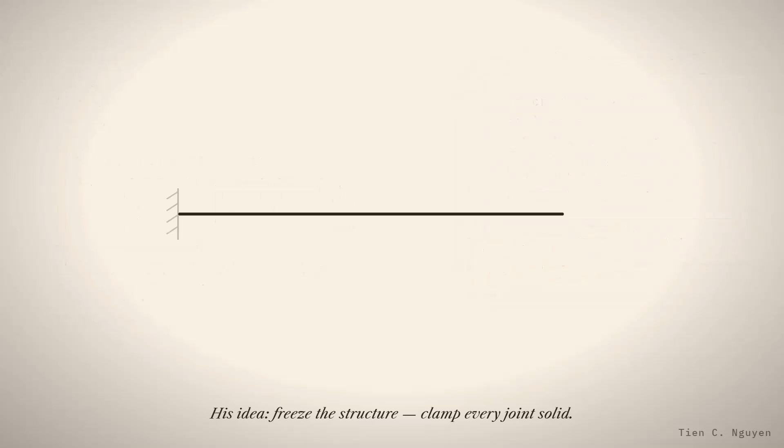Hardy Cross was a quiet professor from Illinois who turned structural analysis upside down. In 1930, he published a paper just 10 pages long, 10 pages that would dictate structural design for the next 40 years. His concept was brilliantly simple: freeze the structure, clamp every joint completely rigid.

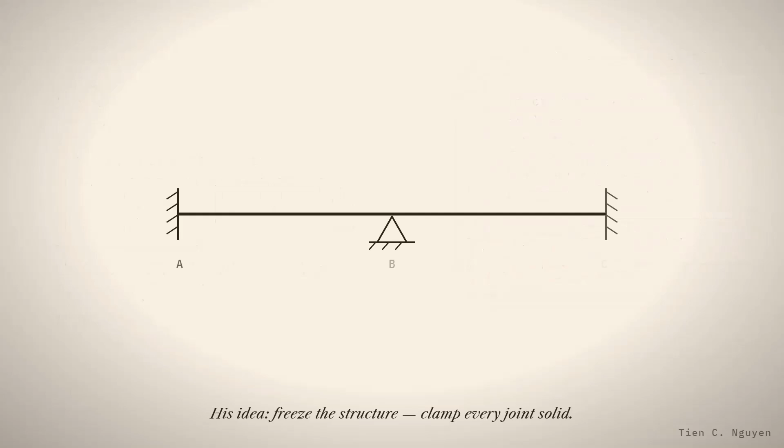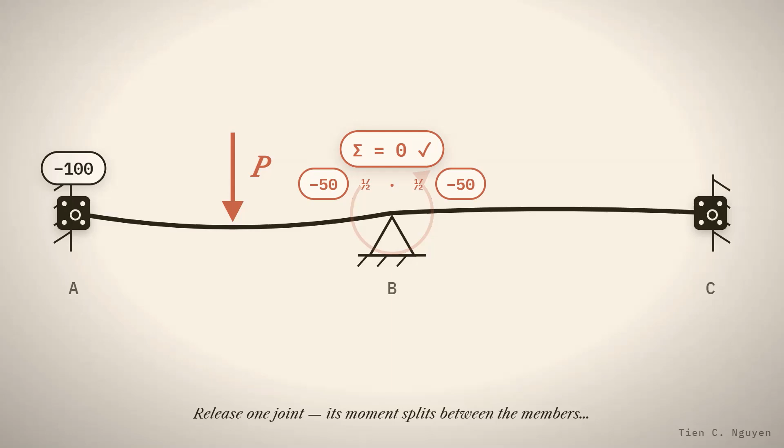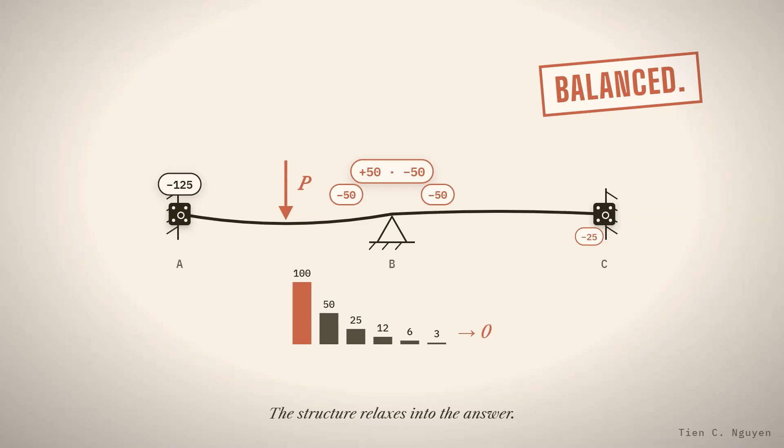Load it up, each clamp locks in an unbalanced moment. Now, release just one joint. Its moment splits between connected members, and half of each share travels next door. Clamp, release, distribute, repeat. With every cycle, the unbalanced moments vanish. The frame quietly relaxes into total equilibrium. No computers required. Just simple, elegant iteration. And that was how the world built its buildings for the next 40 years.

Today, finite element solvers handle the linear algebra in milliseconds. But Hardy Cross gave engineers intuition. He taught us to visualize how moments actually flow. This is the moment distribution method.

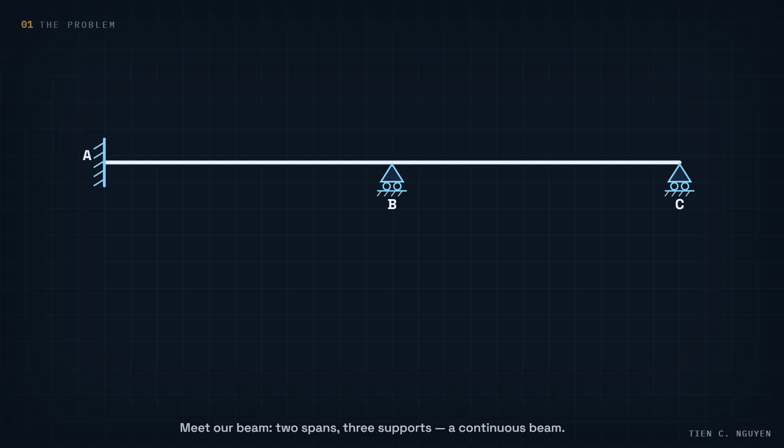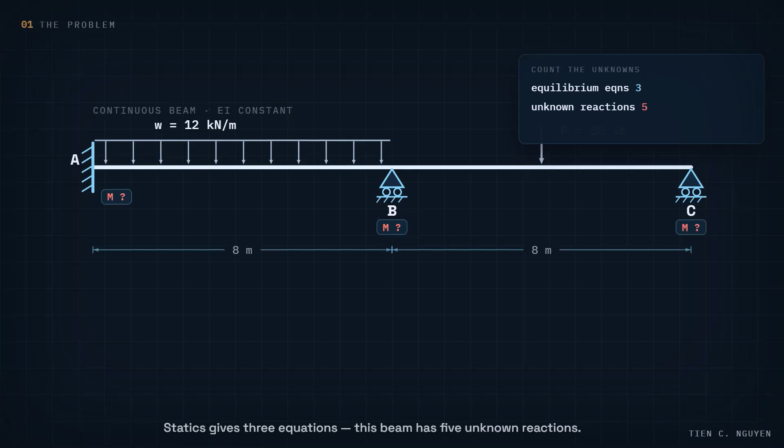Suppose we have a beam with the load configuration shown on the screen. Statics gives us 3 equations. This beam has 5 unknown reactions. It's statically indeterminate. Equilibrium alone cannot crack it. We need a routine.

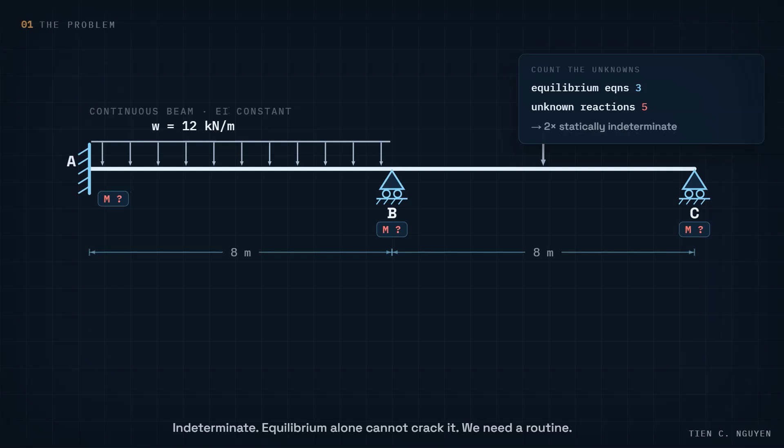Here's the trick. Clamp every joint so that nothing is allowed to rotate. Now release just one joint. It spins until the moments on either side of it balance, and then we clamp it again. Every release leaves a smaller error behind than the one before it, so we repeat until the corrections become too small to matter. That is the entire method.

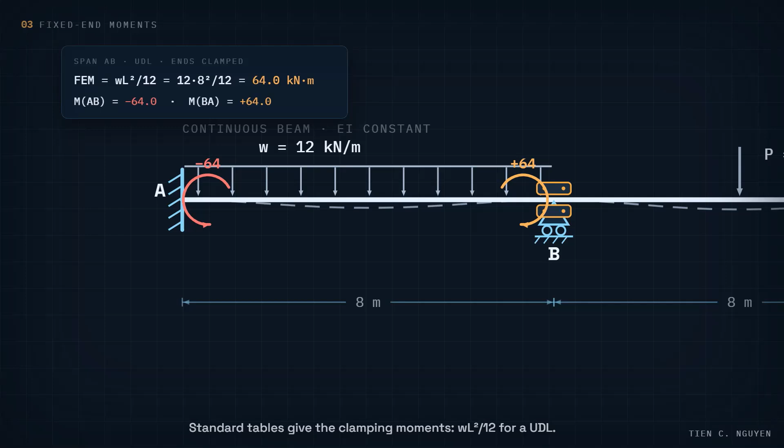Step 1. With every joint clamped, each span behaves as a beam fixed at both ends. Standard tables give us the clamping moments.

Step 2. When a joint is allowed to let go, which member takes the moment? Rotate a member end, and it fights back. That resistance is its stiffness. K equals 4EI over L. Short, stocky members fight hardest and take more. Our 2 spans are twins. Same length, same EI. So their stiffnesses are equal. Each member takes its share of the total stiffness at the joint. That share is the distribution factor, K over the sum of K.

Step 3. Rotate the near end of a member, and the far clamped end feels it too. Exactly half of the applied moment travels across the span, with the same sign. That is the carryover factor, 1/2. Step 4. Set up the bookkeeping. 1 column for every member end. Write in the distribution factors along the top, then the fixed end moments underneath. Everything from here is arithmetic.

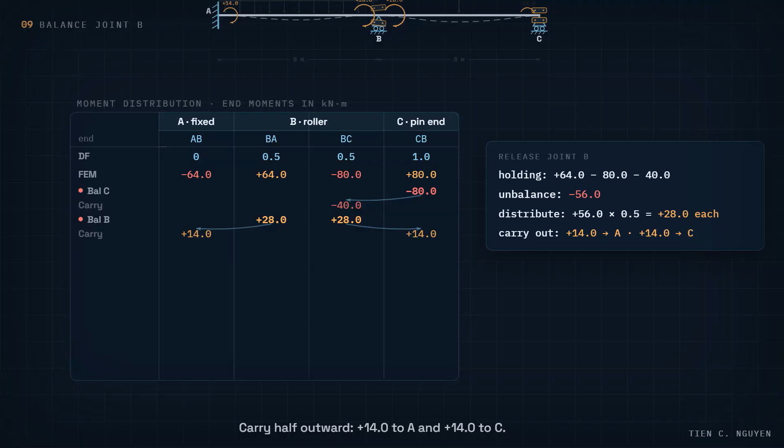Step 6. That carryover just unbalanced joint C again. So release it, balance it, carry over. And go back to B. Watch the numbers shrink. Each cycle is roughly a quarter of the one before it. 80, 56, 14, 7, 3.5. The beam is converging on its answer.

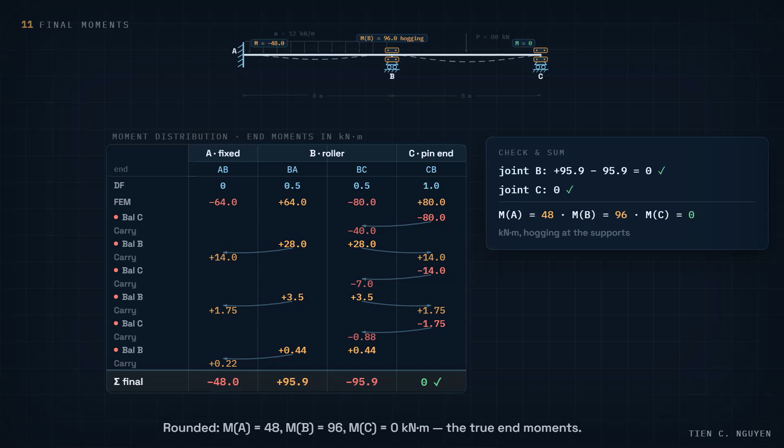Step 7. Sum every column, top to bottom. Joint B, plus 95.9 on one side, minus 95.9 on the other. Perfectly balanced. Joint C, 0, exactly as required. Step 8. Hang the bending moment diagram on those three values.

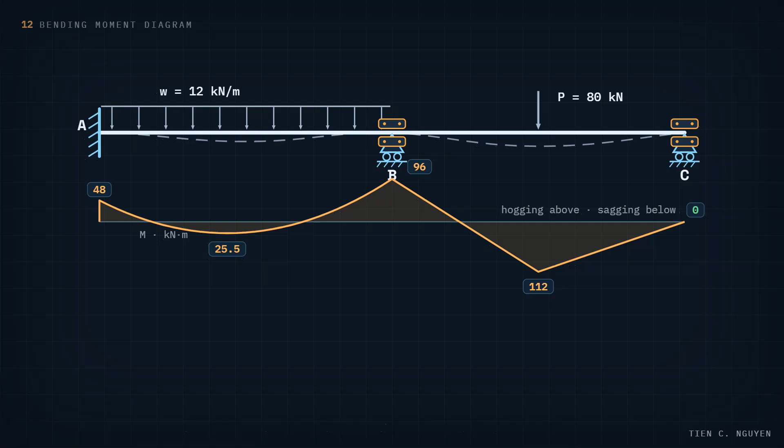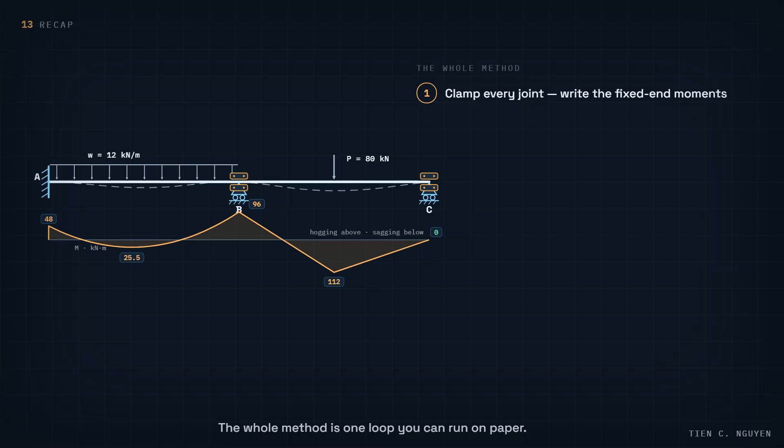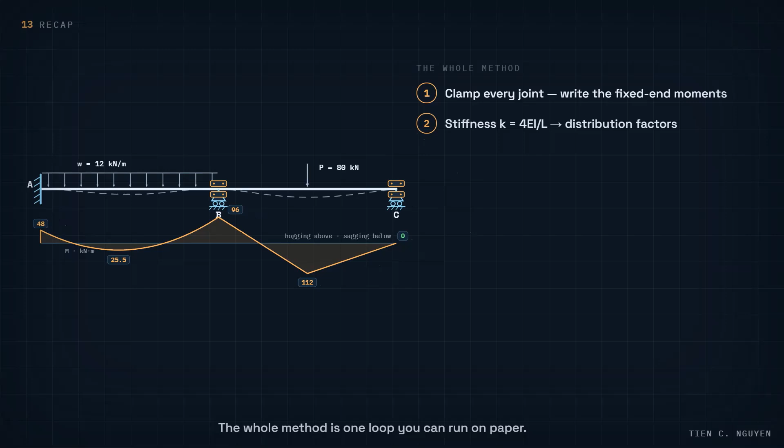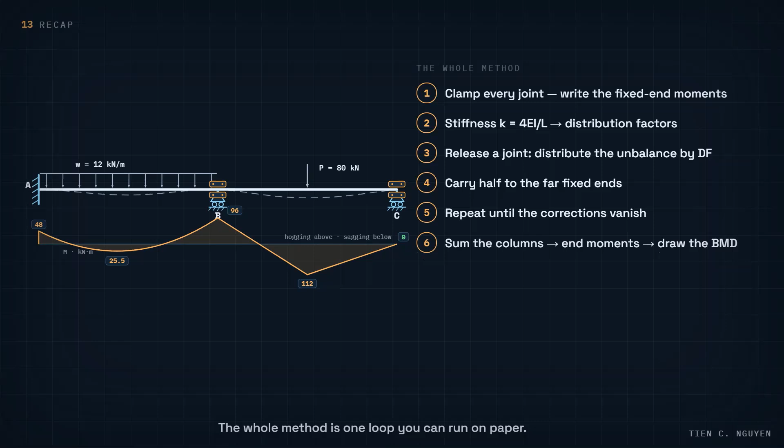And that's the whole method. One loop you can run on paper. Clamp every joint and write the fixed end moments. Get the stiffnesses, and from them, the distribution factors. Release a joint, distribute the unbalance. Carry half to the far end. Repeat until the corrections vanish. Sum the columns and draw the diagram. Hardy Cross turned structural analysis into arithmetic.